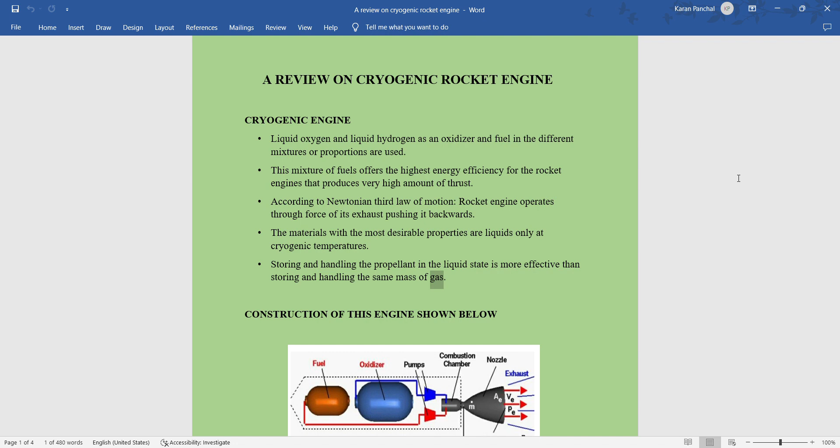The materials with the most desirable properties are liquids only at cryogenic temperatures. Storing and handling the propellant in the liquid state is more effective than storing and handling the same mass of gas. Construction of this engine is shown below. India's GSLV-D5 first cryogenic engine.

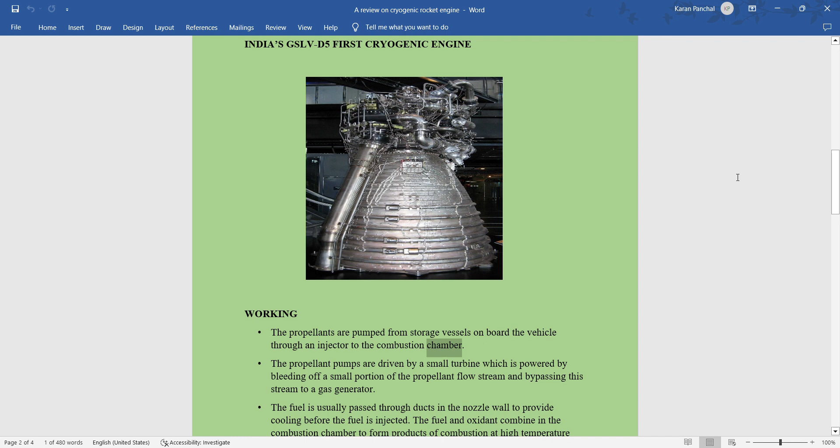Working. The propellants are pumped from storage vessels on board the vehicle through an injector to the combustion chamber. The propellant pumps are driven by a small turbine which is powered by bleeding off a small portion of the propellant flow stream and bypassing this stream to a gas generator. The fuel is usually passed through ducts in the nozzle wall to provide cooling before the fuel is injected.

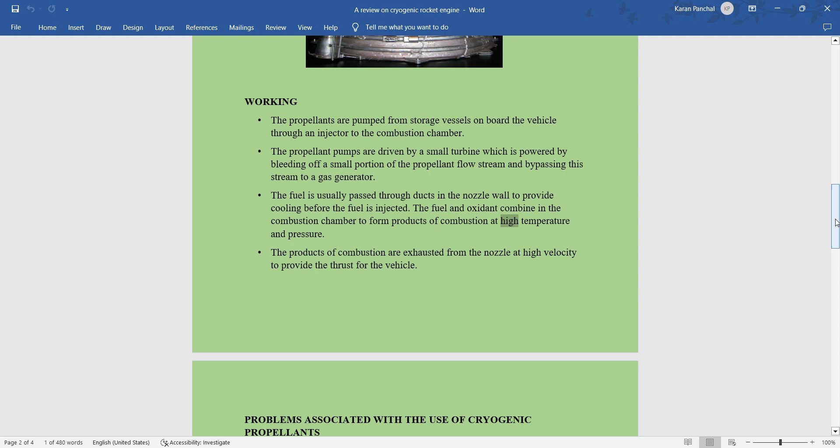The fuel and oxidant combine in the combustion chamber to form products of combustion at high temperature and pressure. The products of combustion are exhausted from the nozzle at high velocity to provide the thrust for the vehicle.

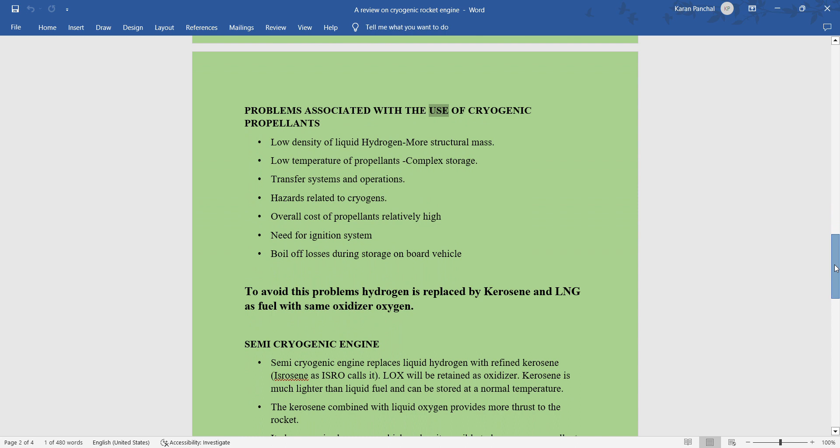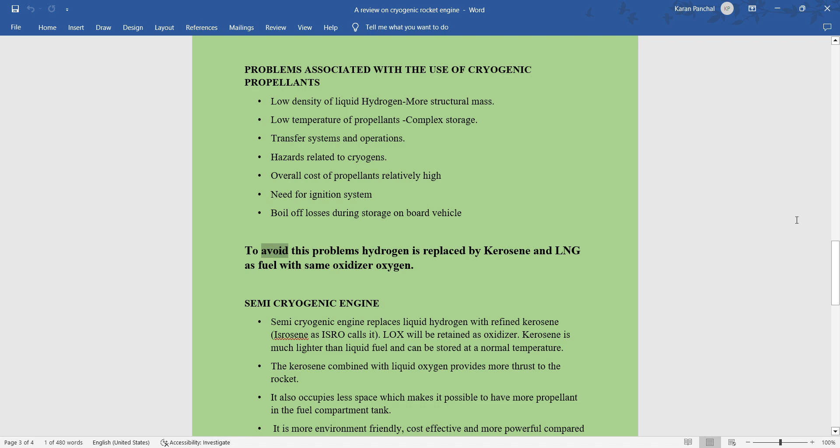Problems associated with the use of cryogenic propellants: low density of liquid hydrogen, more structural mass; low temperature of propellants, complex storage, transfer systems and operations; hazards related to cryogens; overall cost of propellants relatively high; need for ignition system; boil-off losses during storage on board vehicle. To avoid these problems, hydrogen is replaced by kerosene and LNG as fuel with the same oxidizer, oxygen.

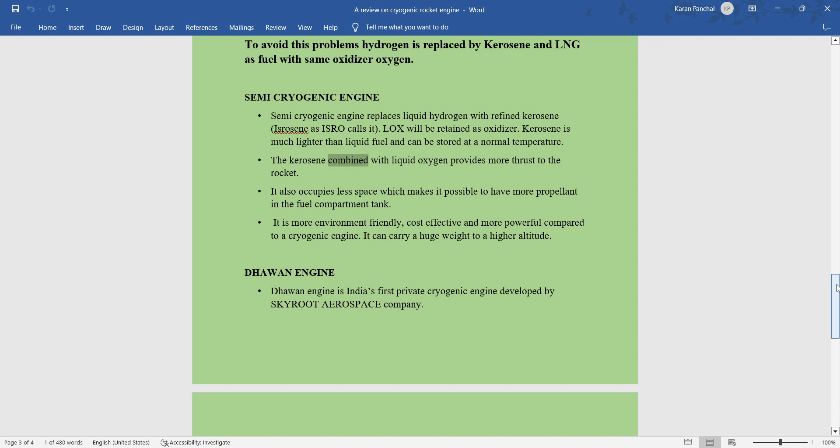Semi-cryogenic engine. Semi-cryogenic engine replaces liquid hydrogen with refined kerosene, isrosene as ISRO calls it. LOX will be retained as oxidizer. Kerosene is much lighter than liquid fuel and can be stored at a normal temperature. The kerosene combined with liquid oxygen provides more thrust to the rocket.

It also occupies less space, which makes it possible to have more propellant in the fuel tank. It is more environment-friendly, cost-effective, and more powerful compared to a cryogenic engine. It can carry a huge weight to a higher altitude.

Dhawan engine. Dhawan engine is India's first private cryogenic engine developed by Skyroot Aerospace. It is used in the Vikram launch vehicle, which can carry payloads up to 720 kilograms to low Earth orbit. This engine is fully manufactured by 3D printer using superalloys, thus its manufacturing time is reduced by 95%.

Tests were carried out and state that it worked for 20 seconds. In this engine, liquid natural gas and liquid oxygen are used as propellant. LNG has more than 90% methane and it gives high thrust, and it is considered a green fuel and rocket fuel of the future. Semi-cryogenic engine and Dhawan engine.